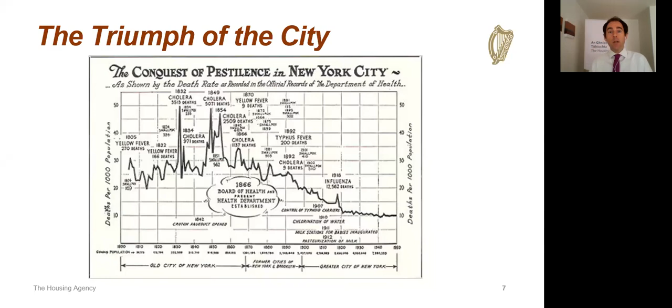The population of New York has rapidly expanded over that period despite the public health issues, and I suppose society sometimes forgets that the public health system does actually get on top of these difficulties over time. The future for cities and for high-density residential accommodation is likely to continue in that sense. That particular slide is taken from Ed Glaeser's Triumph of the City.

Many of you will be familiar with it. Another publication that might be of interest is from Hazel Easthope of the University of New South Wales, The Politics and Practices of Apartment Living. You might be interested in reading those.

So where are we in the country in terms of numbers? Very quickly, Census 2016 tells us there are about 172,000 apartments in purpose-built flats or blocks. In terms of profile, the CSO just last week issued some new data, very timely, on the grant of planning permission of apartments over the period from 2001 to 2019. Apartments is the green line, and you can see it has just very recently outpaced housing as a housing typology, with conventional housing being the other typology over the period.

Just in more recent times, the planning trends in terms of grants of planning permission over the last two years, you can see the orange line is apartments. Some more detail on a deeper dig on the grants over that period, with fine detail over quarters prepared by the CSO. Even more recently, comparing Q1 2020 with Q1 2019, you can see a massive increase in the grants of planning permission over that period.

The CSO have a good table which shows, unsurprisingly, the concentration of grants of planning permission for new apartments by region, with the prevalence in the Dublin area. So that's grants of planning permission. In terms of completions, a different profile of numbers. This compares Q1 2019 with Q1 2020, and you can see the actual new dwelling completions for apartments is up 75% in that period. So again, that's just some background for you.

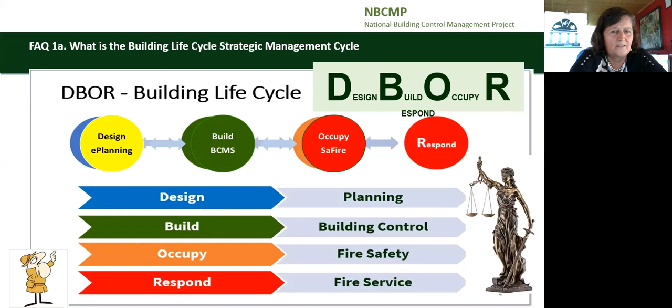The provision of affordable and adequate housing is a key priority for all governments. Sustainable housing requires that the physical, social, cultural, environmental, climate change, and economic facets, and the use and reuse over time of housing, are addressed in an integrated policy.

The barriers to reuse of existing housing include a perception of increased maintenance costs, building regulations, and the inherent risk and uncertainty associated with older building stock. Addressing buildings' adaptive reuse significantly reduces whole life costs, waste, and leads to improved building functionality.

If you look at the Department of Housing, Planning and Local Government's manual, it outlines the approach to the design and methodology for bringing back homes. It's a very useful guide to assist in the redesign and reuse of town centre buildings, and I would highly recommend it.

The purpose of building regulations, in the next slide, in a civilized society, is for the health and safety of the citizen and the protection of the environment.

This slide is a visual representation of the building legislative framework in which building control officers work and operate. The legislation encompasses a holistic approach to provide for safe, accessible, durable, and sustainable buildings, where occupants can be assured of a proper supply of air, light, thermal comfort, and water.

The design and construction of buildings in Ireland is regulated under the Building Control Acts 1990 to 2014. The 1990 Act provides for, amongst other things, the making of building regulations, which are the design requirements of buildings, and the making of building control regulations, which are for administration and ensuring compliance with the building regulations.

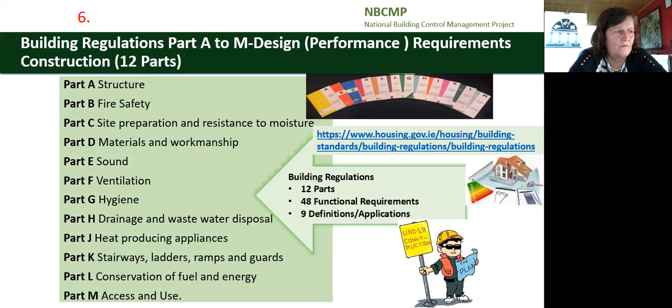It is important to note that the responsibility for compliance with the building regulations rests with the designers who design, the builders who construct, and the owners who normally start the process. So all works must be designed and constructed in compliance with the building regulations.

Just a quick run through the building regulations. Part A: a building must be designed and constructed on proper foundations so that it doesn't crack, move, or fall down. Building elements must be designed to resist large forces of loading, such as people, machines, accidents, earthquakes, rain, snow, for its lifetime, and that also includes balconies.

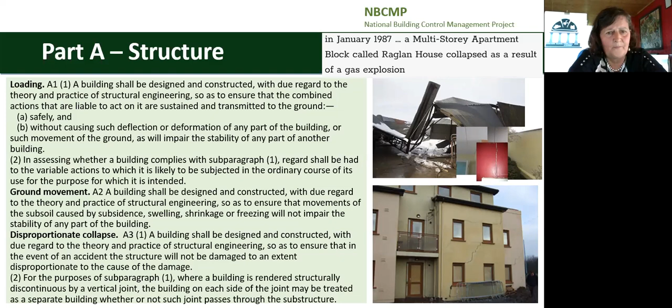Part B is fire, and buildings must have fire detection and alarm systems, a safe place of refuge for people to escape, walls with resistance to fire spread and access for fire brigade. Multi-units should have fire doors, which must be kept closed, and a fire should be contained in the room or unit where it started for a specified period to allow people to escape.

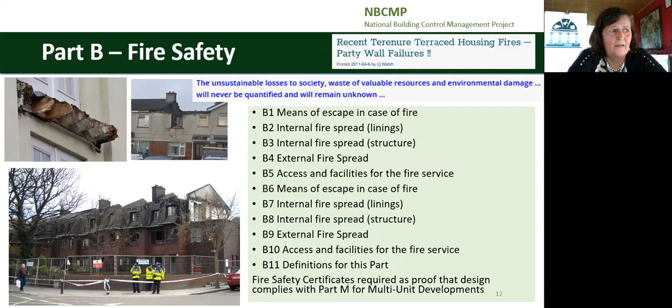Part C, site preparation and resistance to moisture. We must build on a clean site free from contaminants, such as radon. The floors, the walls, the roof must be weather resistant and prevent the passage of moisture to the inside of the building.

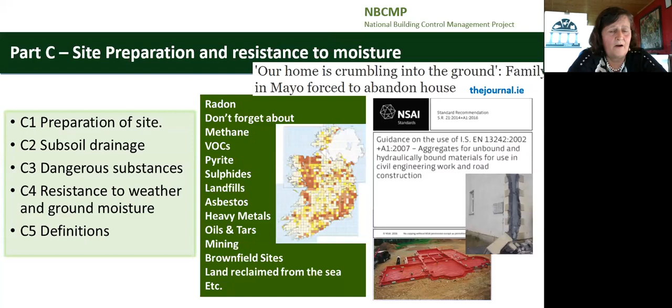Part D, a very important part, materials and workmanship. Buildings must be built in a workmanlike manner with proper materials which are fit for the use for which they are intended and for the conditions in which they are to be used. Materials fit for use in Scandinavia or Poland may not be fit for use here due to the different climatic conditions. Likewise, materials used in inland conditions may not be suitable for use in coastal or exposed regions of this country. Construction materials should be properly CE marked and have a declaration of performance.

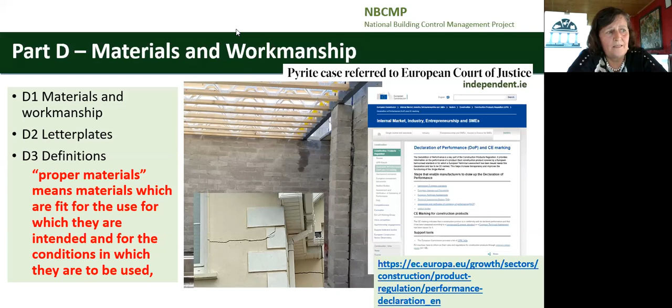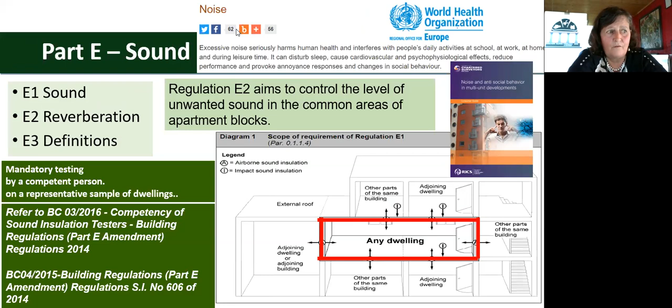Part E is sound. Walls and floors must have a reasonable resistance to airborne and impact sound. In multi-units, it's very important to get this correct - you should not be able to hear your neighbours. For new multi-units, sound insulation performance tests carried out by certified testers should be available, and the type of floor coverings permitted is also very important here.

Part F is ventilation, and ventilation must be provided for people in buildings, which limits the moisture content of the air to prevent condensation and mold growth. Proper supply of clean air into the building while expelling the stale air.

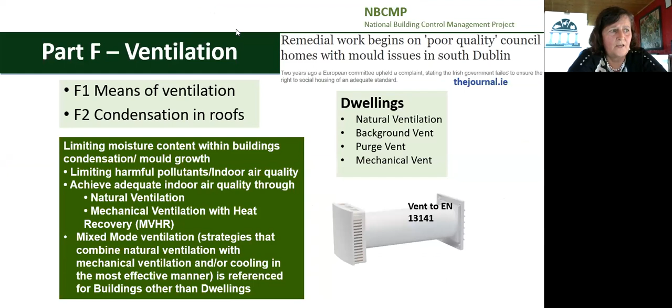Part G refers to hygiene. A building must have a bathroom, hot and cold water with properly insulated storage and service pipes.

Part H, drainage and wastewater disposal, provides for the separate drainage for foul and surface water that doesn't cause a safety or pollution risk. The treatment system design must provide that its function to a sufficient standard for the protection of health in the event of a system failure.

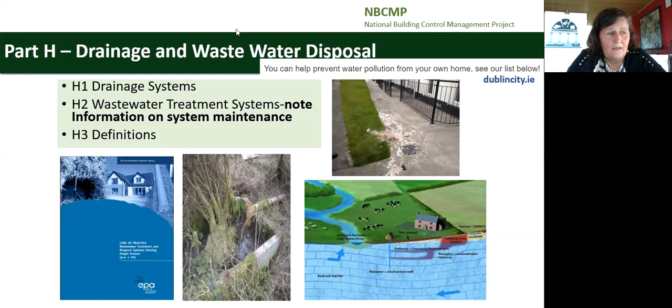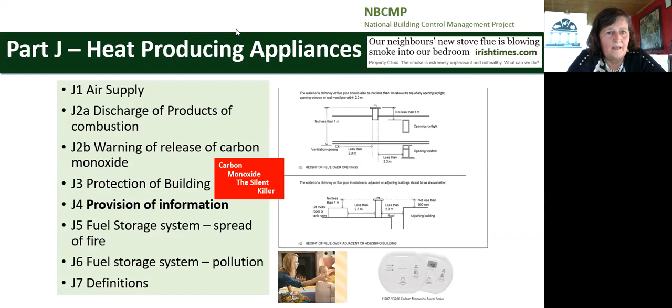Part J, heat producing appliances, provides for the safe discharge of combustion products via flues or chimneys, and oil storage areas must be safely located and bunded. Part J also provides for carbon monoxide alarms and detection systems. A durable notice with operation and maintenance information must be fixed on or near all new or replacement hearths, fireplaces, flues or chimneys.

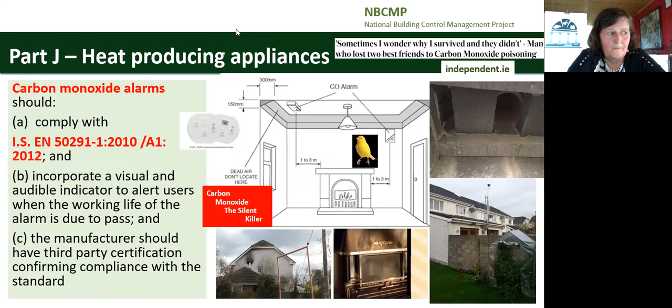Part K, stairways, ladders and ramps. Building users must have a safe passage with guards on floors, balconies, roofs and vehicle ramps to provide for protection from falling as well as falling objects.

Part L relates to conservation of fuel and energy, and it provides for nearly zero energy buildings - that is, energy efficient buildings by limiting the energy required for building operation and associated carbon dioxide emissions. So it limits heat loss from the buildings and ensures heat gains from renewables. 30 years ago, insulation was considered a luxury. Now it's an absolute necessity and a requirement to mitigate against the negative effects of climate change and ensure affordable thermal comfort in our buildings.

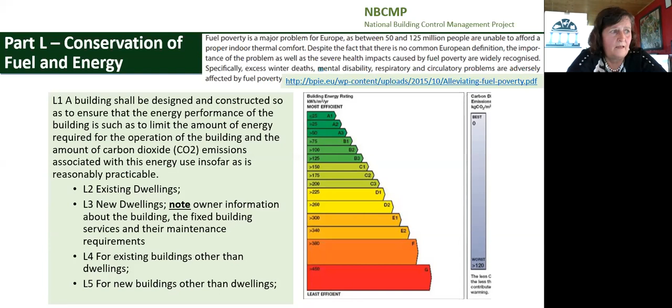Fuel poverty is a serious issue across the whole of Europe. Part M is access and use, and it's really an equality measure that ensures people can access and use a building and its facilities and its environs, extensions, including its sanitary facilities. So that's parts A to M.

Construction products should be clearly marked and have a declaration. A building for sale or letting must have a building energy rating. So all buildings must have a building energy rating, and public buildings should have a form of display energy certificate.

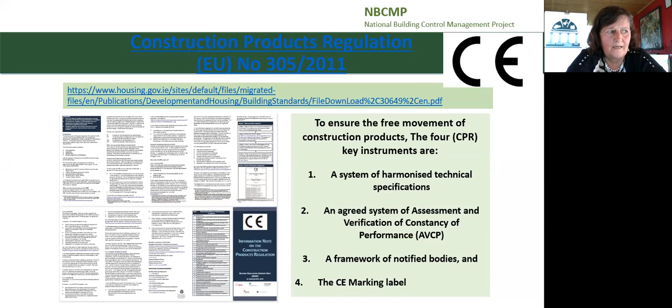Construction products should be clearly CE marked and have a declaration of performance drawn up by the manufacturer. For multi-units, it's recommended that a complete categorized schedule of all building products be available with their CE markings, declaration of performance, certification, and test results. For example, this should be available for every brick, block, insulation, roof material, vent, fire door, railing, window, cladding, intumescent paint, etc.

We do have these buildings for 60 plus years. So sustainable urban housing design standards for new apartment buildings require a life cycle report to be included as part of the planning application, to ensure certainty regarding the effective and appropriately resourced short and long-term maintenance and running costs. It also requires that conditions must include compliance with the MUDS Act, establishment of an owner management company, and establishment and maintenance of a sinking fund for ongoing maintenance and renewal.

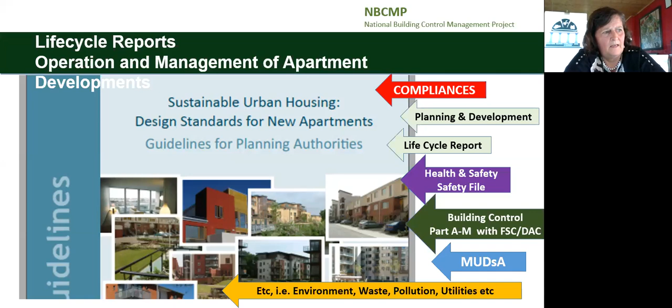So those who produce life cycle reports need to be clear on what is meant by lifespan, and differentiate between design life, estimated design life, service life, predicted service life, and estimated service life in the context of the durability of construction products. Many of these life cycle reports that I've read use the term life expectancy with high-level statements that don't really have sufficient detail to assess long-term running and maintenance costs.

Also, as so many variables change during construction and during the time difference between planning and occupation, the life cycle report should really be a preliminary life cycle report at planning stage, with the final life cycle report forming part of the Planning and MUDS Act compliances.

Schedule 3 of the MUDS Act lists the documentation to be handed over to the owner management company, which includes compliance with the relevant planning permissions, building regulations, design and building control regulations, the paperwork - that's the commencement notices, the proper certificates of compliance on completion, disability access certificates and fire safety certificates.

You must hand over the safety file, as-constructed drawings of structures and services, operational and maintenance manuals, warranties and guarantees, test records for drainage, water and heating systems, a schedule of plant, equipment and fire protection systems specifying the expected useful life of such plant, equipment and systems. It would be very interesting to just look at the complete record for each multi-unit that is handed over.

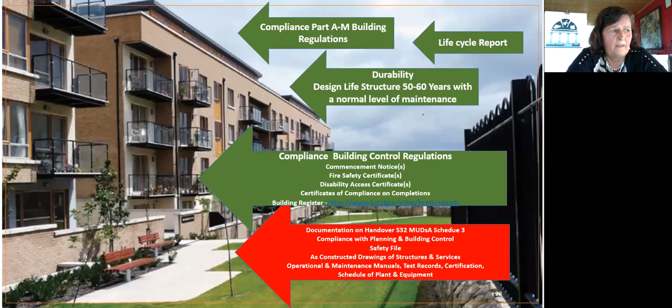In the preparation of life cycle reports, the design life of the building should be defined in the initial brief, and this should reflect the overall development requirement. Design life categories for building products or elements should be clearly specified, with effects of failure and consequences of failure on the building itself and on the occupants - a time frame for repair or replacement, including occupant disturbance.

For example, repairing a flat roof after 15 years of service - will the building have to be surrounded in scaffolding, and for how long? A lift out of order in a 3-story building has less severe consequences than a lift out of order in a 7-story building. So the design life or reference service life of all asset components should be specified in years and categorized with all of their associated compliances.

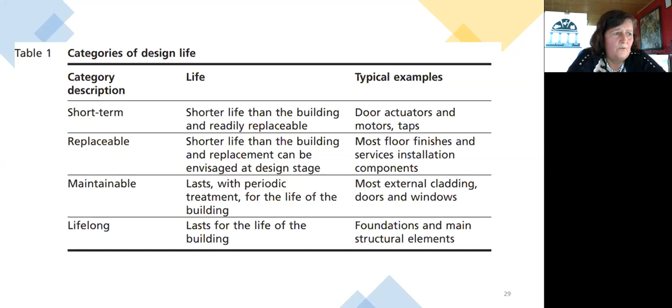It is important that competent persons are involved in the design, construction and maintenance. A competent person is one having sufficient training, experience and knowledge appropriate to the nature of the work to be undertaken. Competent is defined under the building control regulations, and it's quite a useful definition.

The quality of our built environment on health outcomes of people is well researched. People spend more than 90% of their lives indoors. We should note that the vulnerable - babies, the sick, elderly, poor, unemployed, and all of us during COVID-19 - spend up to 98% of our lives indoors. So many health problems are either directly or indirectly related to the building itself. It's very important that buildings are fit for purpose, constructed with proper materials, fit for the intended use and the conditions and location they are in.

Building regulations provide for the health, safety and welfare of people in or about buildings, conservation of fuel and energy, and access for people with disabilities. For multi-unit developments, compliance with Part A to Part M of the building regulations should be available, and it should be absolutely mandatory as part of the documentation.

We must remember that when we build today, we will not only have consequences for this generation, but the next, and probably the next generation after that. We must put people first by ensuring proper planning and sustainable development, providing for a quality built environment where people can live, work and play. This really does require a serious commitment to life cycle design, and a serious commitment to ensuring full compliance with planning, building control and the MUDS Act for all apartments and multi-units.